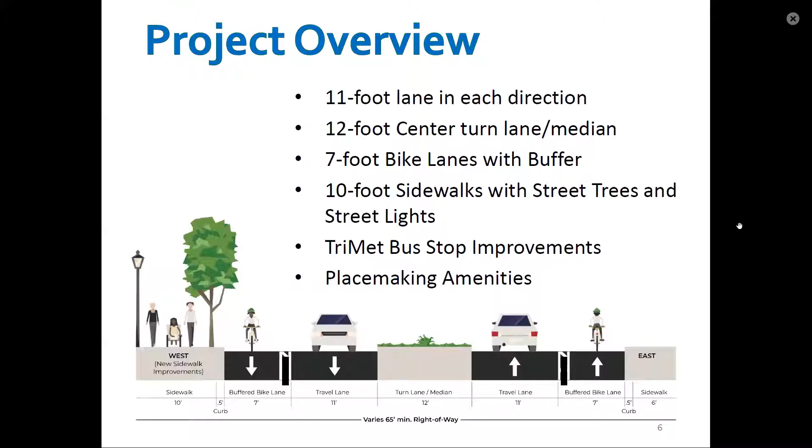We might have met you last year at one of our open houses. We talked to a lot of neighbors, answered a lot of questions, and got a lot of good feedback.

The types of outreach were newsletters. We reached out to about 1,250 businesses and residences. We held multiple neighborhood association meetings, multiple open houses, canvassed businesses, sent out design surveys, and included project information in utility bill inserts, and held meetings with the citizen involvement groups.

If you participated in the online survey in April of 2019, you may recognize some of the words in the Wordle graphic. These were the key comments we heard from you that helped the project team make the design decisions.

Now I want to introduce David from Kerr Contractors, who'll walk you through the construction schedule. Thanks, Brian. My name is David Finnegan. I'm with Kerr, and we're going to be doing the construction part of the whole project now that we've been awarded.

So, construction schedule: the job will start roughly July of this year, and it will take about 1.5 years to complete. Construction will be phased, meaning we'll begin in summer, July of this year, working on the north end near where Molalla Avenue ties into Beavercreek Road, on some water line.

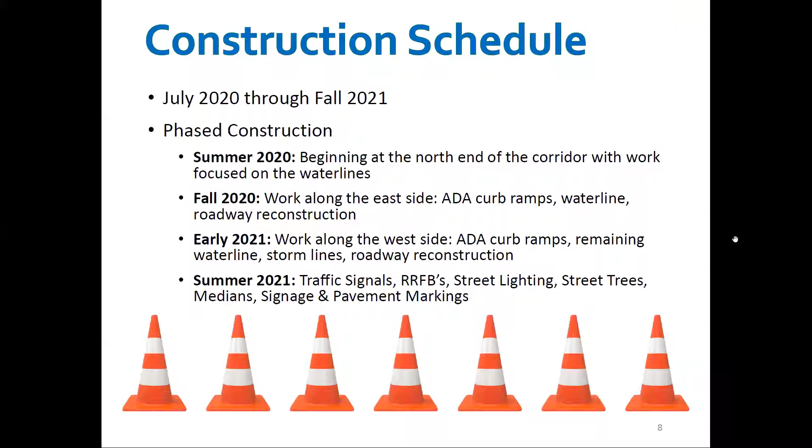With that, I can have Jason Kelly with DOWL talk to you about construction and daily impacts. Thank you, David. My name is Jason Kelly with DOWL. I'll be working with David and Brian to manage the project, mainly coordinating the inspection staff as well as coordinating with the design engineers on the project.

For this project, the majority will be standard city working hours, weekdays from 7 a.m. to 6 p.m. In order to facilitate the work along Molalla Avenue, the roadway will be limited to 2 travel lanes, meaning there won't be a center turn lane for the duration of the project. We need that extra space to get our work done, so the roadway will feel more constrained. Be sure to use caution when driving.

For traffic control on the corridor, we'll use construction signs, orange barrels, cones - we call them candlesticks. We'll also have blue business signs as well as blue cones to delineate business accesses, and we'll be using portable changeable message boards like you see out there already.

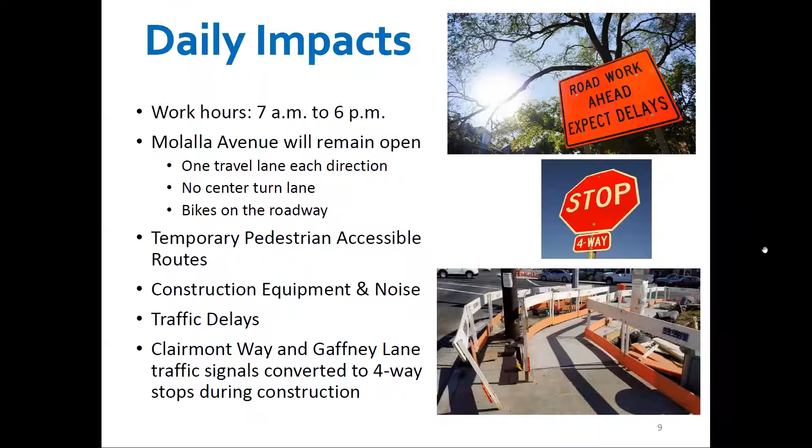At times, the contractor will need to temporarily close one lane. When that occurs, the crew will use flaggers to guide traffic through the corridor.

For night work, the project team carefully reviewed the pros and cons. In this busy corridor of Oregon City, we see about 13,000 daily vehicle trips, with the majority occurring between 11 a.m. and 6 p.m. So the project team allowed the contractor to work nights on certain components. The night work will shorten the overall project timeline, limit impacts during the day and regular business hours, and allow the contractor to work when there are fewer vehicles on the roadway.

During night work, residential properties along the corridor should experience some construction noise. You may hear muted backup alarms, excavation, and compaction activities. At this time, the contractor anticipates night work at the beginning of the project to install the new water line, with short duration periodic work throughout the next year. The contractor will work nights mainly in congested areas - signals, driveways, and utility crossings of the road - places we just can't do during the day.

Regarding short duration closures of side streets and driveways, the existing pavement on Molalla Avenue has reached the end of its useful life. You've probably seen a lot of potholes and cracking. In order to completely rebuild the pavement, which consists of 19 inches of new rock and asphalt, construction will impact the ability to use side streets and driveways.

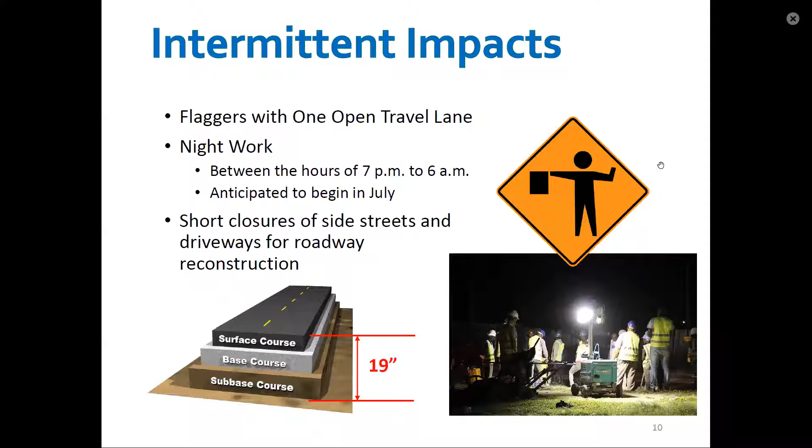Thank you, Jason. We understand this is a sensitive time for businesses, and it's our goal to make sure business access is open and clearly identified during construction. One of the ways the project provides visual cues to vehicles traveling along the corridor is placement of an A-frame sign and blue construction cones to identify open business access locations. This concept worked really well on another project in the area recently.

Additionally, we know there are various single-family properties along the corridor. The project team will work with those property owners to maintain access to their properties, and Kerr knows how important business access is and will communicate and coordinate with businesses when working in commercial areas in the corridor.

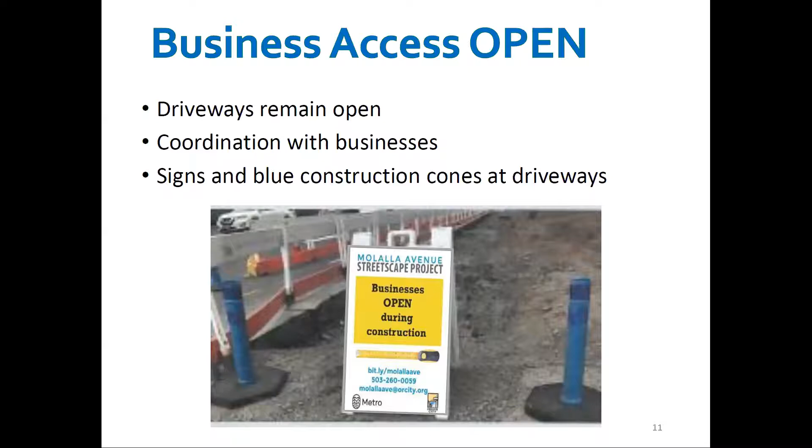So I'm going to walk you through this corridor. Starting at the north end of the project, this image shows the Colton Place, Adrian Way area, between Hilltop Mall and Goodwill. I'd like to share some of the operational capacity and safety features the project will provide in this section. Green pavement markings and striping will be installed in high conflict areas of the bike lanes. This safety feature was recommended by bike advocates in that area at one of our open houses.

To address operational capacity and safety issues, the project team is recommending changes to the Molalla Avenue and Beavercreek intersection. We currently have 2 through lanes on southbound Molalla Avenue between Warner, Milne, and Beaver Creek. The current inner through lane, as it approaches Beaver Creek Road, will be converted to a second left turn lane onto Beaver Creek Road eastbound. This change will remove the flashing yellow arrows for the southbound left turn movement, which is one of the movements at the intersection that creates a high number of angle crashes.

Removing one of the southbound through lanes will remove the dangerous merge we currently have on the south side of Beaver Creek near Marquis. Additionally, traffic analysis has shown that in the future we will need to provide dual left turn lanes from northbound Molalla Avenue to Beaver Creek Road towards the Red Soils employment area. The proposed lane usage allows future projects utilizing the yellow hatched area to implement those dual left turn lanes without reconstructing the road. We anticipate this capacity project would be needed in the next 7 to 10 years.

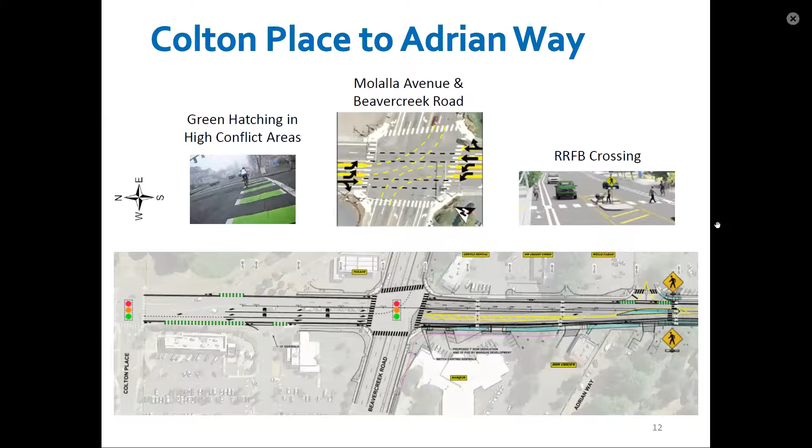This image shows Clairmont Way to Gaffney Lane, which is the area between Jo-Ann and Fred Meyer's. There are some operational and safety features to the project that we will provide in this section. TriMet will be installing bus shelters at the northbound stop at Clairmont Way and Gaffney Lane. Bus stops not getting a shelter will be getting benches and trash receptacles. To address operational and safety concerns, both traffic signals at Clairmont and Gaffney Lane will be reconstructed to be ADA compliant. Over the past few years, the Clairmont Way and Gaffney Lane intersections have had more than their fair share of crashes and near misses.

The project team reviewed the crashes and heard from the community their concerns with how these intersections operate today. To address those concerns, each of the signals will have dedicated left turn lanes from the side street and will have a protected movement. This allows the left turn movements to occur separate from the through movements and the pedestrian crossings.

This creates a safer intersection for vehicles and pedestrians. Another request we heard at one of our open houses was a suggestion to include pedestrian double push button features that will allow additional time for crossings at the Gaffney Lane signal. We agree that will provide a safer crossing experience for those who need a little more time to cross.

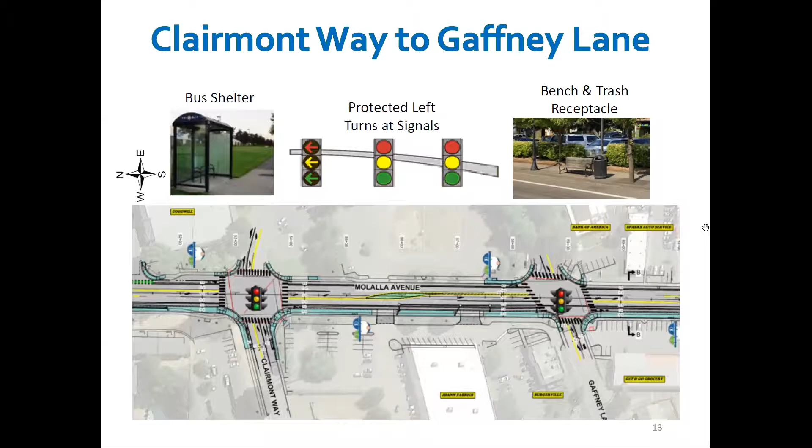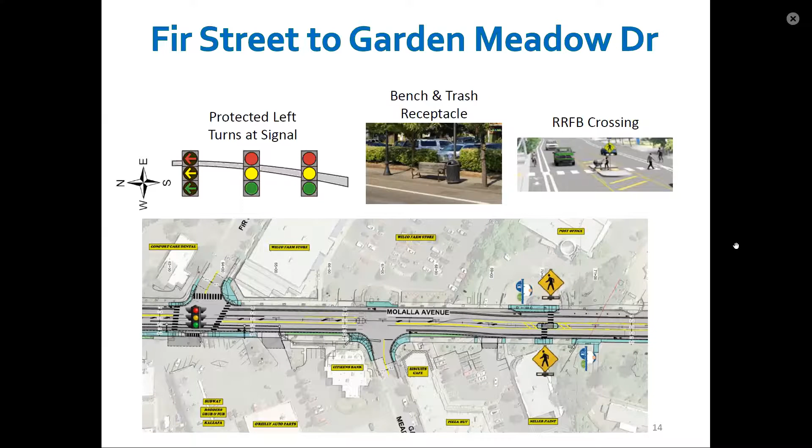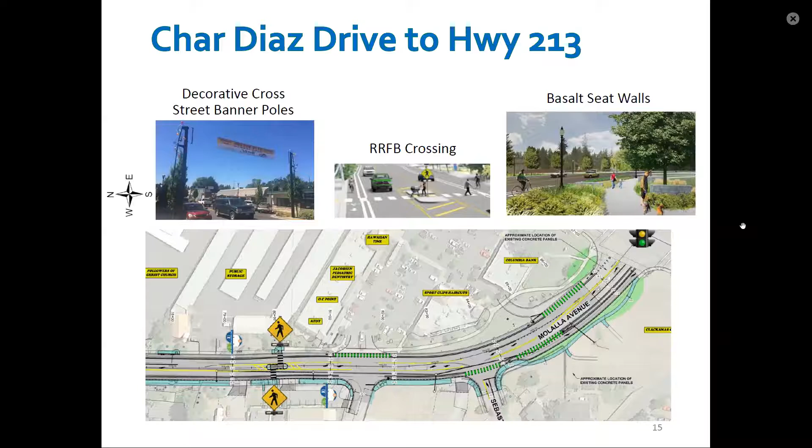And now Dana will walk through some of the project funding. Thanks, Brian. Again, I'm Dana Webb, City Engineer for the City of Oregon City.

The Molalla Avenue Streetscape project is a great example of combining a variety of capital improvement needs along a corridor into one project. This project includes many smaller projects the city needs to address, such as replacing aging distribution water lines, adding a new transmission water line, reconstructing the full pavement section we've been deferring for many years, replacing outdated traffic signals, adding a new traffic signal, and the grant funding allows us to complete the missing sidewalk, biking, and access to transit infrastructure in this key corridor.

Combining all these into one project minimizes the impacts to the public by not working in an area again in a short period of time. It allows us to leverage our city funds with grant funding and to share project expenses like open houses, mobilization, and traffic control. Kristen, I'll hand it back to you.